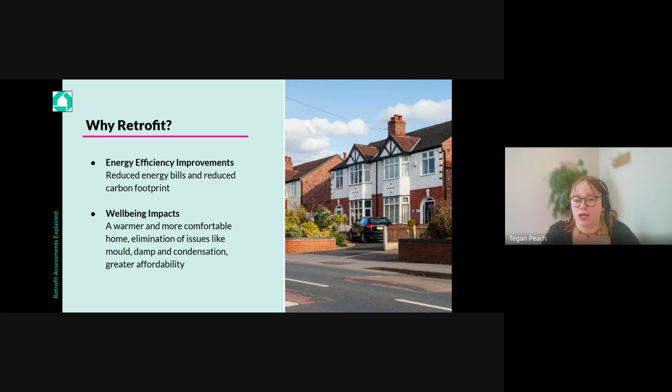So now you know why you should consider retrofit, but what does the retrofit assessment process actually look like and entail? At Building Energy Experts, we handle the first four stages of the retrofit assessment process. The first is the brief: you come to us and we identify what you feel the issues are with your home—we talk about insulation, your doors and windows, anything like that.

The next step—I'll go into more detail on exactly what a retrofit assessment is—is basically a detailed and comprehensive assessment of the home. Then we follow that up with further testing to diagnose any further issues, carried out alongside the survey. The final stage we carry out is coordination and design, where we look at remedial works that evenly consider cost and overall improvements to the home. So, what is a retrofit assessment?

A retrofit assessment is a full condition survey of the home, where we aim to collect holistic data on the overall state of the property.

In the assessment, one of the main things we look at is your building fabric. Your building fabric basically refers to any individual component that makes up your home, including your doors, windows, walls, heating system, ventilation system, insulation, basically anything that makes up your home.

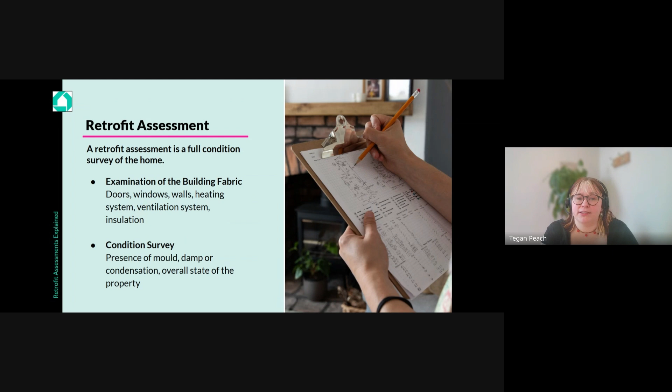We'll also look at the overall condition of your home, including things like mold, damp, and condensation, which can then be attributed to issues with your building fabric. And then we'll also look for any structural concerns, whether that's cracks in the walls or ceilings, or any other damage to the property.

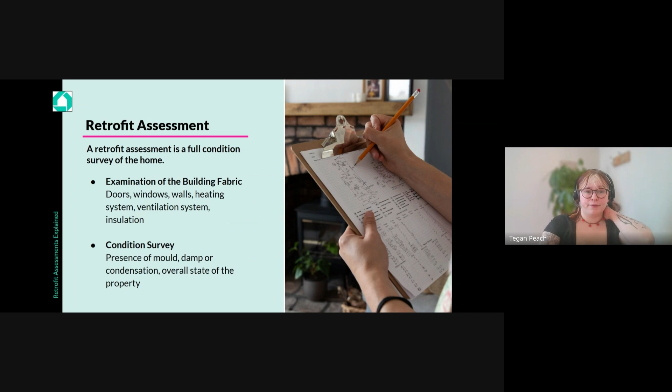Carried out alongside a retrofit assessment, we typically carry out retrofit testing. Does anyone have any examples they can think of of retrofit testing? Any ideas? Feel free to put them in.

Yeah, Jason, that's a good one - air test. I saw you raised your hand, Keith. In terms of answers, if you've got access to the chat, just put them in there and I'll read them out. Then at the end, if you have any questions, you can put your hand up and we can answer that then.

So the main retrofit tests we carry out - first one, as identified by Jason, is air tightness testing. I'll go into that in more detail. Then you've got cavity wall inspections, thermographic surveys, and part F ventilation testing. I'll discuss air tightness testing, cavity wall inspections, and thermographic surveys in this presentation.

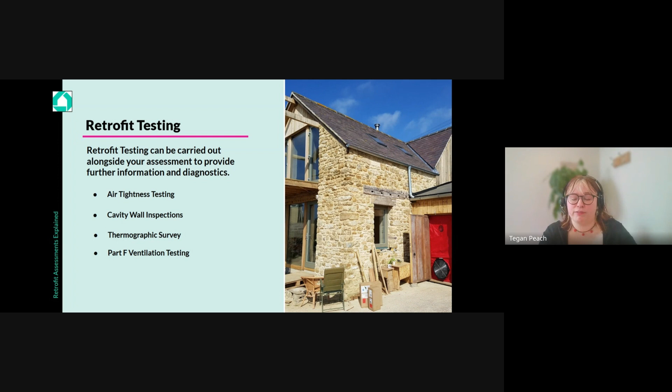It's worth noting that part F ventilation testing is actually included in our retrofit assessments as standard. That could include looking at things like extract fans in your bathrooms and kitchens, trickle vents in your windows, and also looking at fan flow rates. These are included in our retrofit assessment. We've got a lot of great blogs on our website if you want to read more about Part F and how it relates to retrofit, and also air testing as well.

So the first test we would look at is air tightness testing. These are basically tests that measure the air permeability, or in simpler terms, how drafty your property is - how much of the warm air from inside is escaping out of things like your doors, windows, insulation, any other gaps. There are multiple methods you can use for air tightness testing.

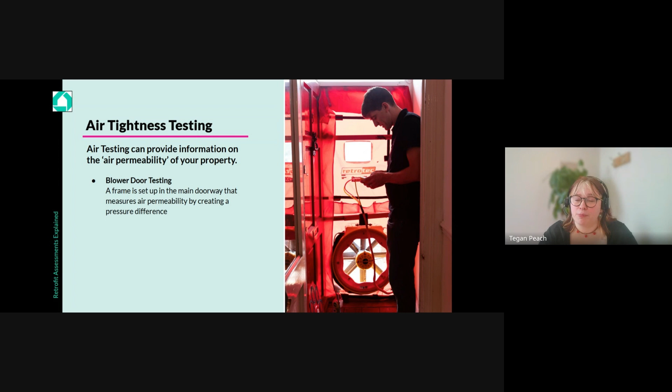One of the main ones we use is a blower door test. You can see our MD Jack with a blower door kit there. We basically set up a big frame in the doorway, and it creates a pressure difference between the inside and the outside of the property. It's really good for diagnosing and identifying and quantifying exactly where air leaks are escaping. Common areas for air leakage are things like skirting boards, doors, windows, around pipework, and how much of that draftiness is occurring.

Another piece of kit we use is called a pulse kit. You can also see our MD Jack with a pulse kit there. It's a large cylindrical piece of equipment that works very similar to a blower door kit, but it creates a pressure shock wave as opposed to a pressure difference. It also allows you to identify air leakage.

Either of these tests will provide an air permeability score. This score is basically a figure that attributes how drafty your home is, and quantifies how much of that air is escaping and to what degree. For diagnostics, we would tend to recommend a blower door kit, as they allow for further information.

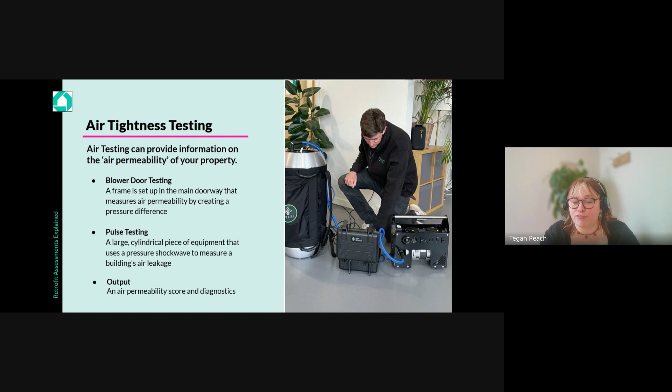Next survey we may recommend is a borescope survey or a cavity wall inspection. This is our assessor Stan using a borescope kit. A camera is attached to a drill that drills through the cavity hole in the wall, allowing you to visualize the internal wall.

When we're talking about insulation, that could relate to the continuity of the insulation, which has a habit of sinking down in the wall over the years. These cameras are a really good way to visualize that, and they also allow you to see the quality and degradation of the insulation in the wall.

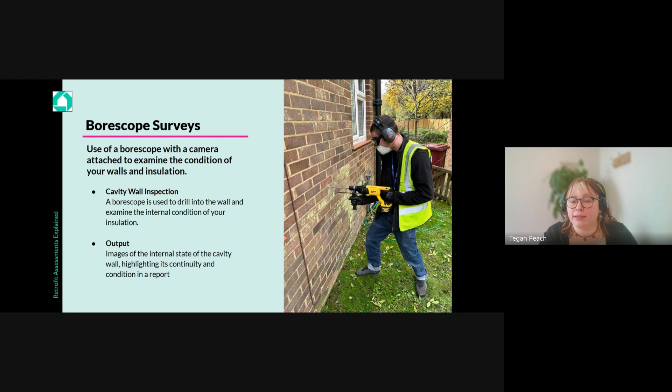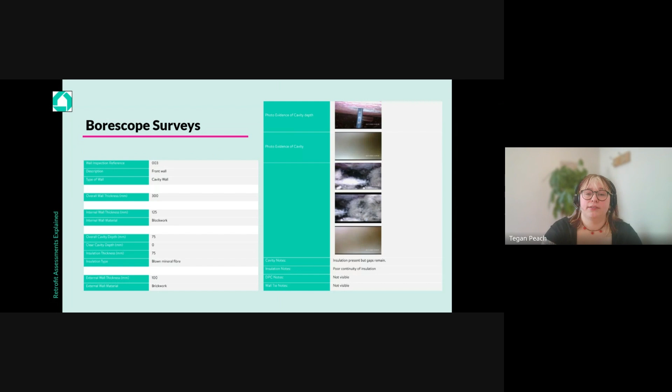The next survey we'd look at is a thermographic survey. These utilize thermal imaging cameras to look at where heat is escaping out of your property. One of the main things thermal imaging is really useful for is identifying regions called thermal bridges, typically caused by gaps in insulation, which highlight areas of quite drastic heat loss.

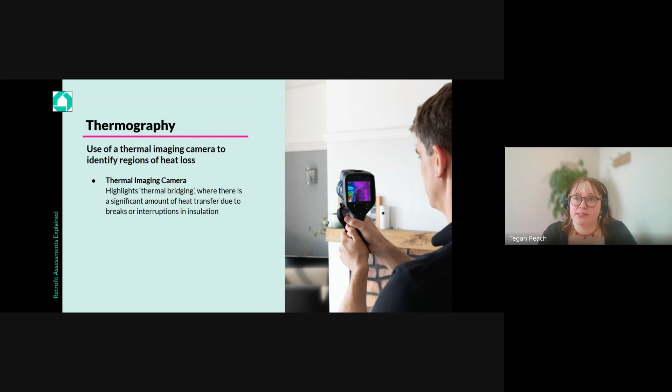These thermal bridges identify areas that typically accrue a lot of mold, damp, and condensation because there is such a drastic change in temperature.

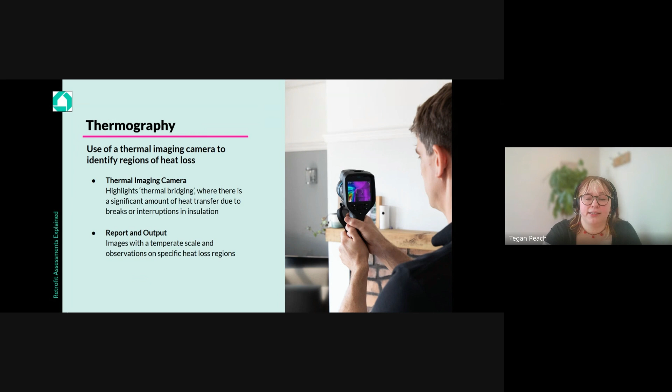That's the area where, because there's either a gap in the insulation or an issue with your doors and windows, you're going to see a lot of issues like mold, damp, and condensation. It's really good to identify these and get out ahead so you can sort them.

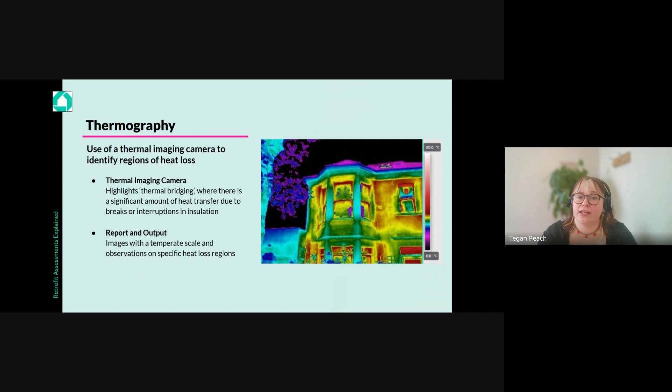These tests together provide really useful insights alongside the assessment into how well your property's working, what isn't working, and what needs to be remedied. So now you know what a retrofit assessment is and what retrofit testing is. How does it all fit together, and how do those puzzle pieces match?

Let's say in this case study, a resident comes to us and says they feel their home is always cold, and that heat is dissipating from their property quite quickly. They have their heating on for the night, turn it off, and find the heat just immediately leaves their property within half an hour. They've spent that money and not really gained much from it.

So in this case, the resident's goal is to get a warmer home and also a home that retains heat better and is therefore cheaper to heat. So the next step is the assessment.

Let's say we send our assessor on site to complete that comprehensive, holistic view of the property, which is a retrofit assessment. They note that there's condensation and mold growth around the windows, and they also find that the walls are quite cold to touch. That's really useful information we might look at in assessment.

Then while on site, we follow that up with some testing. Let's say our assessor carries out a borescope survey and an air tightness test alongside their survey. Once you've got that information from the brief, what the resident wants to address, the retrofit assessment, and the testing, it then leads on to the diagnostics.

Let's say in this case study, the borescope survey has highlighted that the insulation is of poor continuity. Like we spoke about before, that can mean the insulation is sunk down in the wall, so there are gaps where there's quite a lot of heat loss occurring through the walls. That's where the assessor would have touched the wall and found it quite cold to touch.

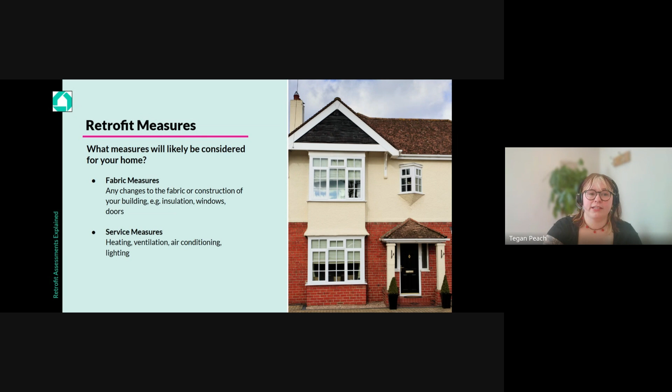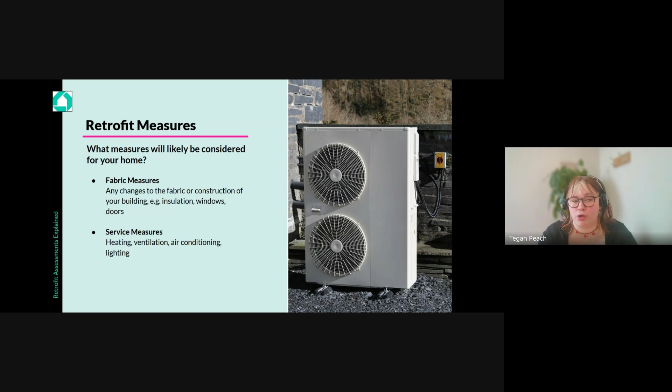The next category, which is probably the one people know most about, is renewable retrofit measures. That can include anything like solar panels or solar water heating, which use a renewable source to keep your home energized and warm. All of these options are really great ways to retrofit your home. Selecting the right method for you depends on your budget and cost, what you're looking to achieve, and what you want to get out of the retrofit process overall.